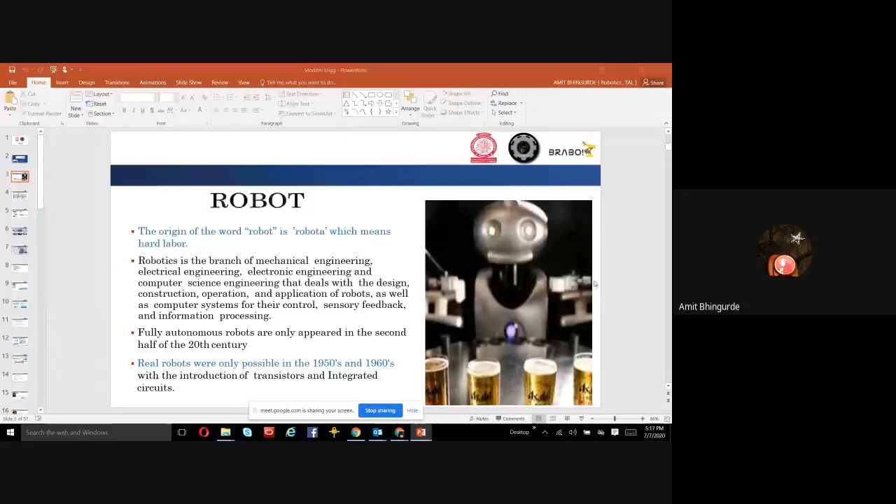Now, if you see the difference between the robot and a human being, if you take features like manipulation: in the human being, manipulation happens with the arms, fingers, legs, or muscles, whereas the robot has motors, drives, and some forms of actuators. There's vision, which is the eyes for the human being, and for the robot it's a camera.

Smell is the nose for human beings, but there's no smell sense presently developed for robots, though research is going on in Japan and Europe on how smell can be detected. Similarly, for taste we have the tongue, and no particular element has been developed for that, but research is still going on at this level too, because robots can also start tasting.

There has been some research already, and good results have come up in this area. Feel is a sense for human beings, and tactile sensors are basically for a robot which can sense multiple things.

Nowadays, a sense of feel for the robot is also available, which can sense and feel. Communication for the human being is the nerves, whereas the robot has fiber, wires, optics, radios. Thinking capacity for the human being is the brain, and the robot has a controller, basically computers and microprocessors.

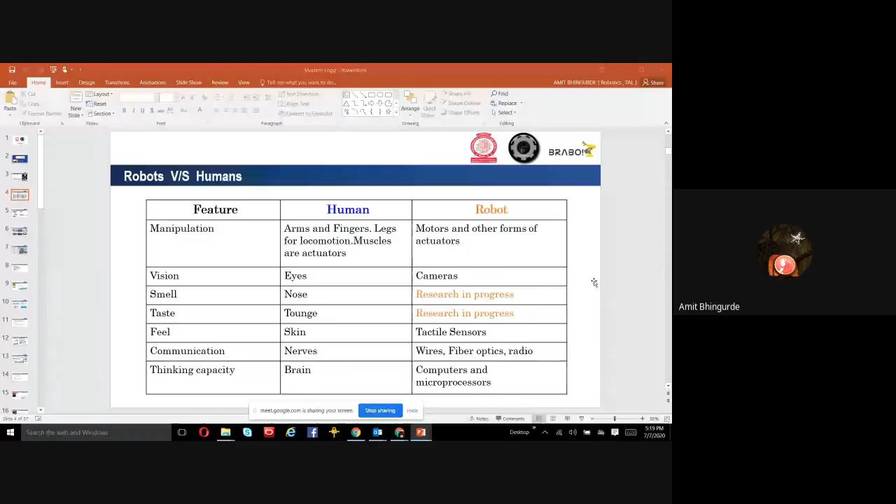So if you take the area of robotics, it is mainly categorized. This is my categorization; there could be multiple categorizations, but as far as robots are concerned, I would categorize them into four different areas.

That is industrial robots, mainly used in most industries, small scale industries, as well as OEMs, and service robots. Those are medical robots, security robots, research robots, household robots, and entertainment robots.

Now the third category is collaborative robots, recently developed, which can work together with a human being. And finally, soft robots, like RPA, robotic process automation.

So what are these robots developed for? Mainly to find out how to do tasks that are dull, repetitive, and dirty. There's so many examples—I'll give some in the next slide—but dirty tasks, dangerous, difficult tasks. There's space robotics coming up now, underwater robotics, robotics assisting physically challenged people, nuclear science, and biomedical equipment.

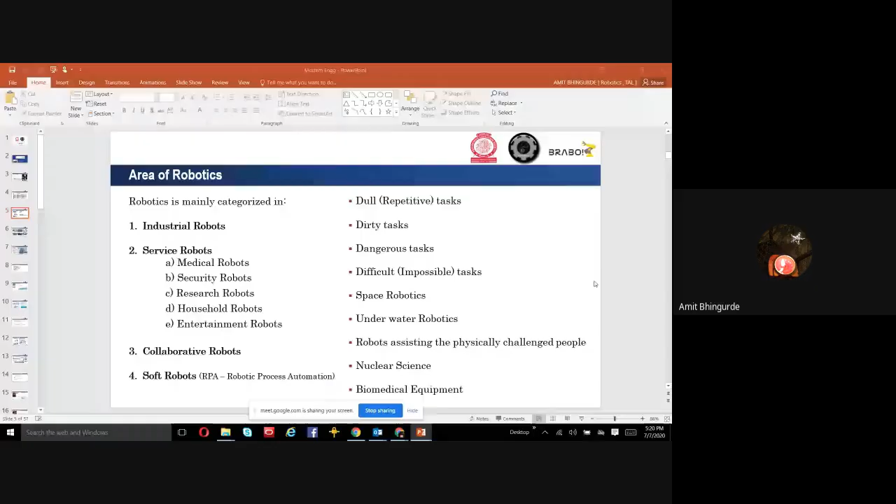So these are the areas of robotics. Some examples: in medical, you must have heard that robots are now doing heart surgery.

There are some robots doing knee surgery. There's robotic aircraft. There are military robots doing security. Also, most robots in Israel, for example, are doing border security—there's no human being, but everything is managed by the robots.

The industrial robots are the normally common robots; some of you must have already seen them. These robots are widely used across the world.

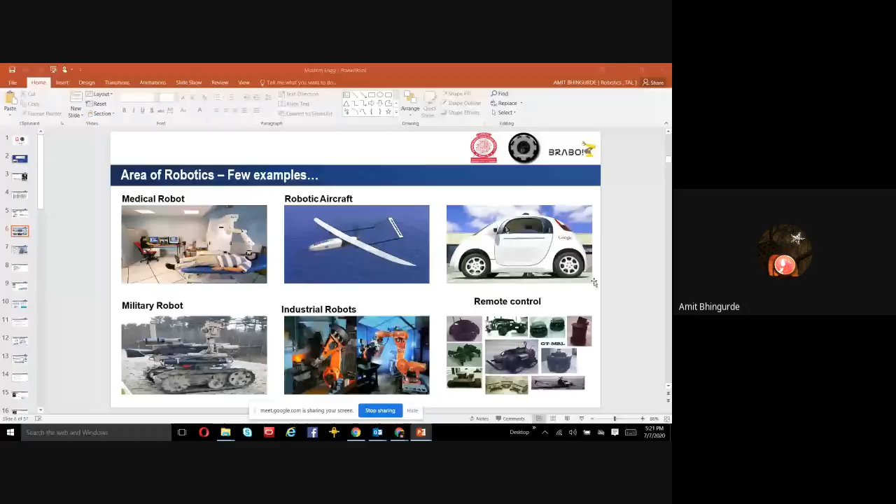And finally, these are remote control robots. Like now, autonomous cars are coming—Google has developed a car without a driver. So those are also called remote control robots.

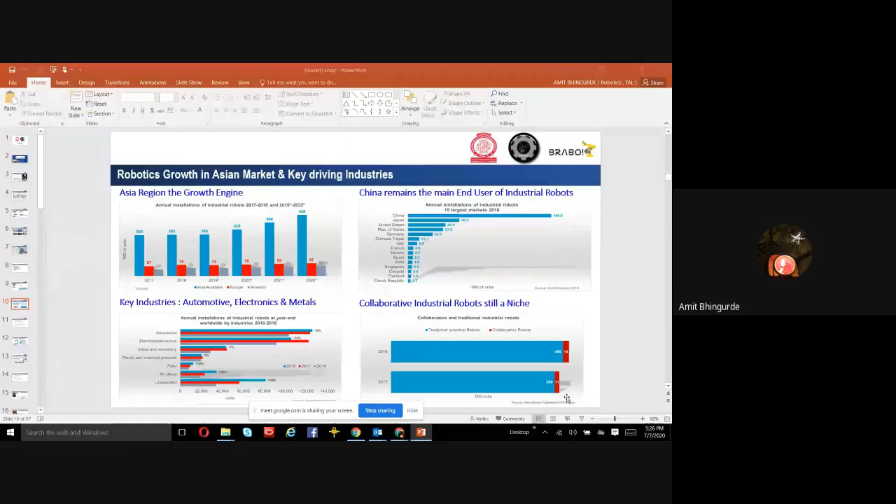So today, the technological development expanding robot adoption is mainly because of more intelligent components, that is smart grippers, because the robot can take a particular gripper, and the gripper has sensors and a lot of intelligence. That is one of the biggest components in robotics. Second is greater connectivity, like plug and play. You can take the robot, plug it in, and start working on it, making multiple applications.

There's also cloud computing. It's easier to use. Earlier you needed special skill sets to use the robot, but now it has been made very, very easy, basically through programming by demonstration, because you show it, and through visual inspection, the robot can understand the program of what you want to do, and it can perform the activities.

What is going to happen tomorrow? You all must be knowing now about machine learning, deep learning, and artificial intelligence, which is going to enable the robot to learn by trial and error. You may not be perfect, you don't know what activity needs to be done to perform a particular task, but the robot can learn and then perform by trial and error. There's self-optimization also possible by robots, and it can also communicate with other machines through different operating softwares.

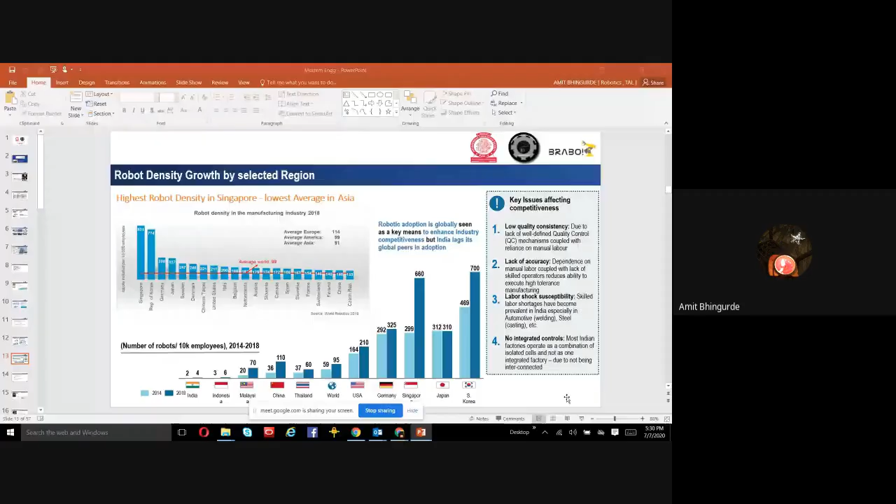So today, because of the current situation, there could be some turbulence in the future for robotics, but the future for robotics is still bright because the demand is going to increase in developed countries as well as non-developed countries because of the current situation. So automotive industry is basically going through a transformation.

Today you must have seen that a lot of automotive industries are having internal combustion engines, which run on petrol, diesel and gasoline, which is getting transferred to electrical vehicles. This is going to be a huge change that could give some dip to the robotic industry also, because consumption will be less till they develop the electrical vehicle.

There is also declining sales, especially in smartphones, automotive, real estate, consumer goods, etc. That will also impact it a little bit. And there are some political headwinds like trade wars, currently between China and America, and globally there are a lot of trade wars going on. That will give some turbulence in the robotics business.

However, tomorrow, the new emerging and rapidly growing market is going to happen in most countries, because everybody wants to go for change, a new style of living because of the current situation. There's also increased manufacturing flexibility expected in most industries. Everybody has an aspiration for a different car; nobody would like to have the same car their neighbor has. That is the reason everybody looks for flexible manufacturing, different kinds of robots, and different types of equipment. Anybody would like to have a new kind of equipment.

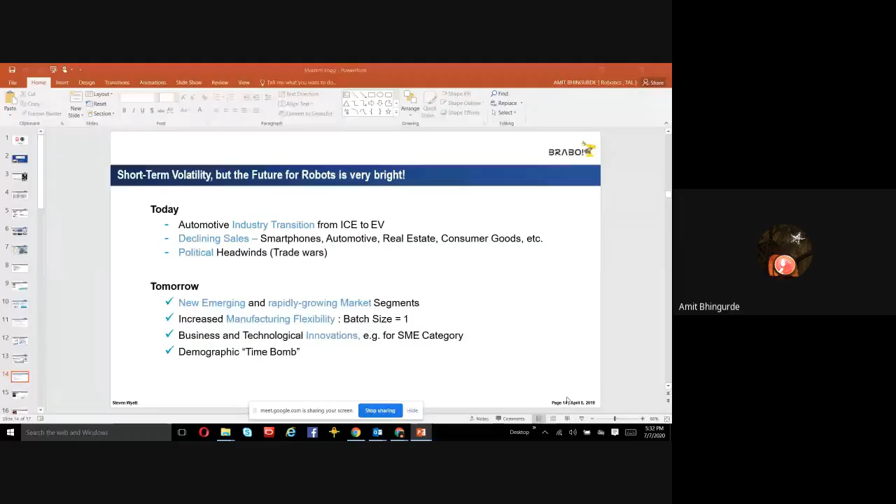Now coming to the service robots, as I mentioned earlier, industrial robots and service robots are the major categories. In the service robot segment also, there's huge growth happening from 2018 onwards. In 2018, a 32% increase happened, whereas by 2022 it's expected to be almost 45% increase in the world for service robots. The service areas are logistics, medical robots, field robotics, and defense. The major growth will happen in logistics.

Earlier, there were small grocery shops. Today you see a lot of malls, and in the malls when you want to find a particular material, you don't find it. You need to really search in the mall. So there's a possibility that robots can find the right material for you.

That is why robotics is going to increase in the logistics area. Medical, of course, you must have seen robots coming in, especially during this COVID situation. Field robotics is also a huge demand area.

Currently in India, we are very good in agriculture. A lot of our economy depends on agriculture, but we don't have so many robots in the fields. Whereas in America and Europe, there are a lot of robots in the fields, but unfortunately their economy is not so dependent on the fields. If we can bring more robotics into the fields, there's a lot of opportunity for the Indian market, and of course for defense for all countries in the world.

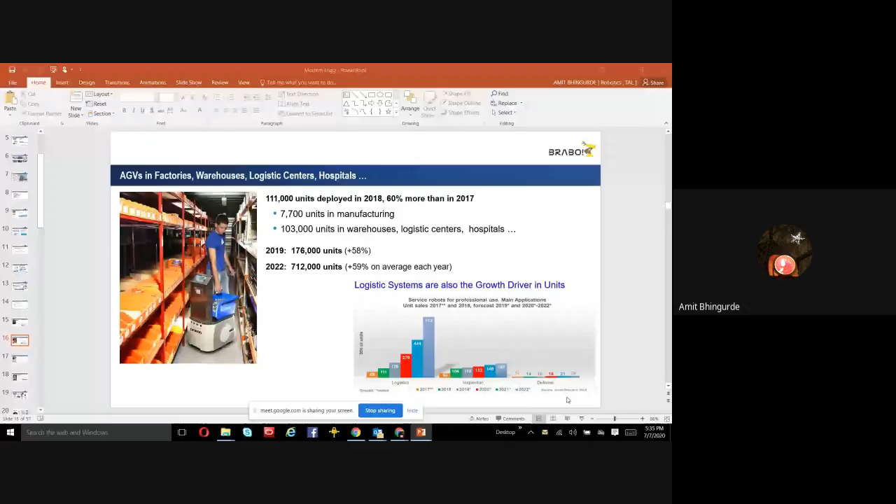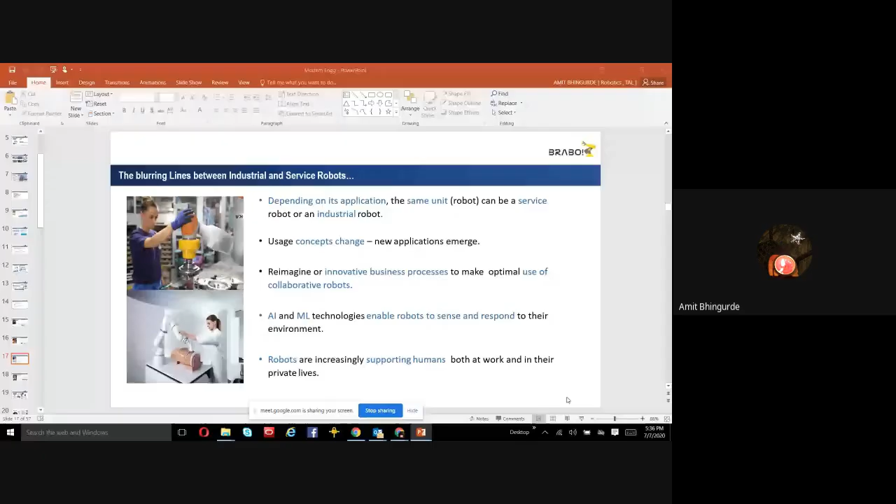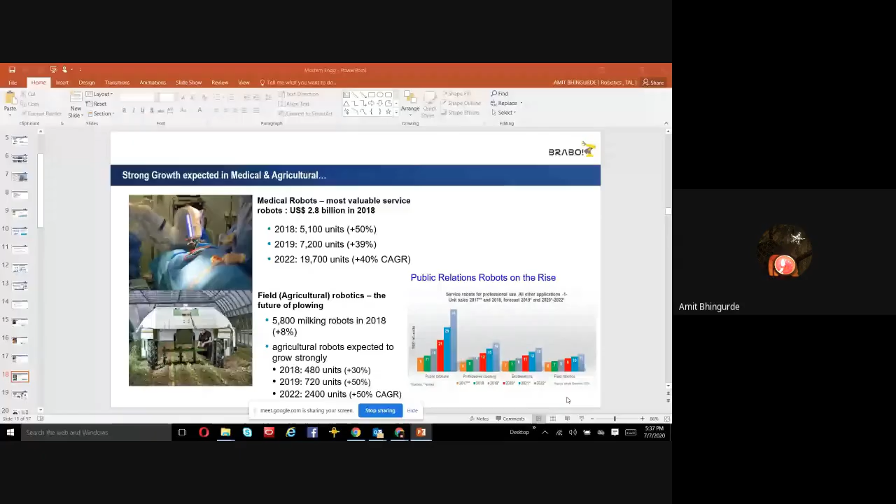There's field robotics, which I already mentioned, with a 50% increase expected in agriculture. Most of these robots are also used as milking robots. There was 8% growth in 2018, and further growth is expected, almost 50% by 2022.

So with this background, I wanted to come back to our own company, Brabo Robotics and Automation, and how it was formed. To give a little background of robotics in India, we started in 2000. This company, called Telco Automation Limited, was formed out of two divisions of Telco. Earlier Telco, now Tata Motors, had a Machine Tool Division and a Growth Division. These two divisions got combined together, and TAL was formed.

In 2015, we entered the robotics and automation business. We created the first Indian articulated robot, and we showcased this robot in 2016 in Mumbai in the Make in India program, which was widely accepted. In 2017-18, we launched this robot with about 10 kg and 2 kg payload capacity.

The idea behind making this robot came from when we were making the Indica plant. The Indica plant was first made in 1999. We installed the first robot in Tata Motors in 1995, the first time we used a robot in a Tata Motors line, mainly for the first newly developed indigenous car, the Indica. The line was made especially for the body shop, where the complete body is made for the Indica.

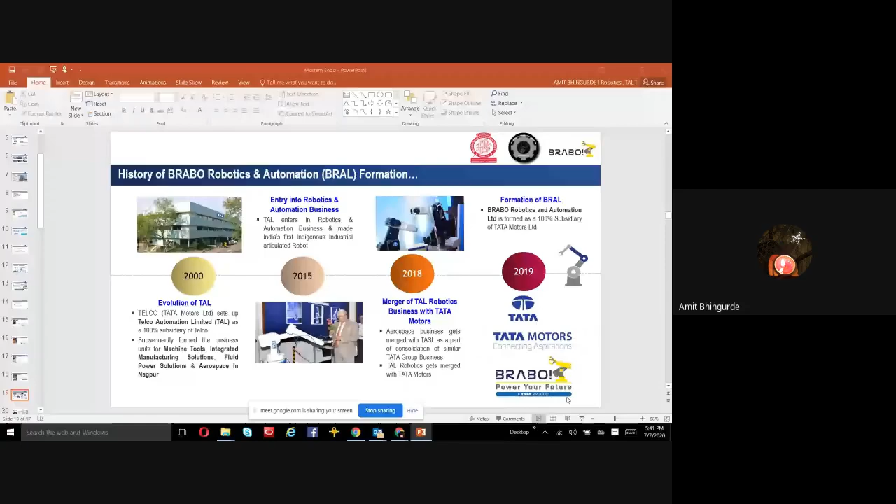In the beginning at Tata Motors, as I mentioned earlier, Indica was 105 seconds. We created a second line for Vista and Manza at 54 seconds - earlier it was less than 2 minutes, now we created a line for less than 1 minute. This is what operational excellence means - we keep improving. The latest cycle time in any body shop worldwide is only 27 seconds. You can imagine one car comes out every 27 seconds in Germany.

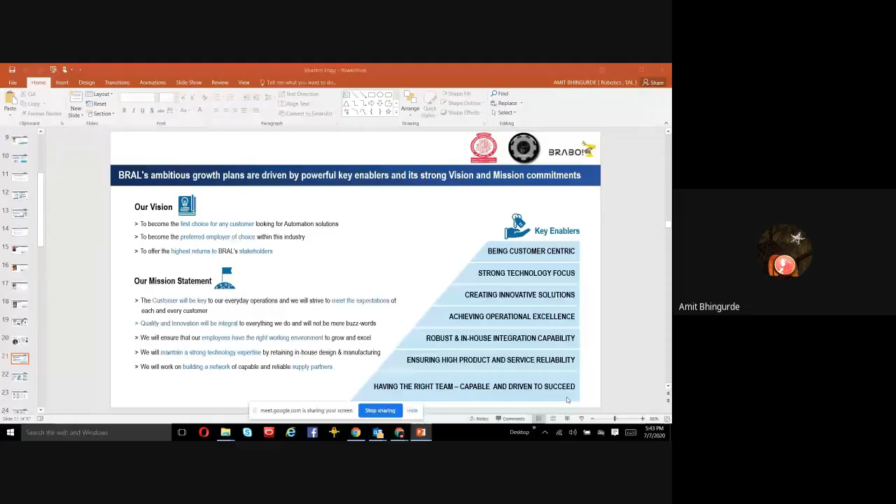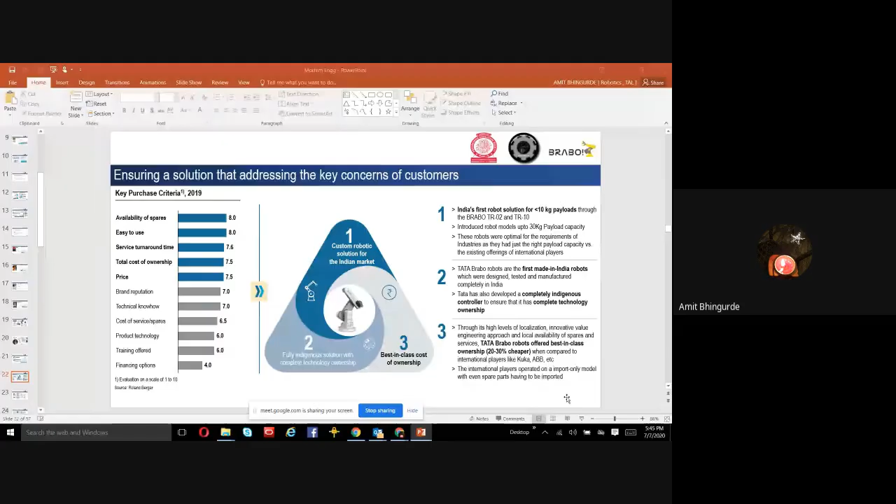Considering this, we decided to enter into robotics, and we created the first indigenous robot in India. We are the company that created the first articulated robot manufacturing line, and we launched this robot in 2017 April. To start with, we created a 10 kg payload capacity robot.

Why 10 kg? Somebody may ask. As per the ILO standard, that is International Labour Organization standard, any operator can lift up to 10 kg payload capacity. And the reach of the robot is about 750 to 800 millimeters, again like a human arm.

And the speed of the robot is almost 1000 millimeters per second. This is actually more than sufficient, like a human being doing repetitive work, dull work, and some of the dangerous work. So that is why we created the robot with this specification to start with.

Then we created a 6 kg payload capacity robot, mainly used for welding and other applications. But those robots were mainly stepper driven motor and belt driven motor. Subsequently, we created a high speed, high reliability, and high repeatability robot for 12 kg and 20 kg using servo driven motors.

These robots we have recently launched, but the 12 kg, 10 kg and 6 kg payload capacity robots we already installed in most of the small scale industries. Now more than 100 plus robots are working across India, and that was a good breakthrough for us and for Indian industries, especially creating such kind of robot for small scale industries. And these industries are not only automobile industry, we have given it to different industries.

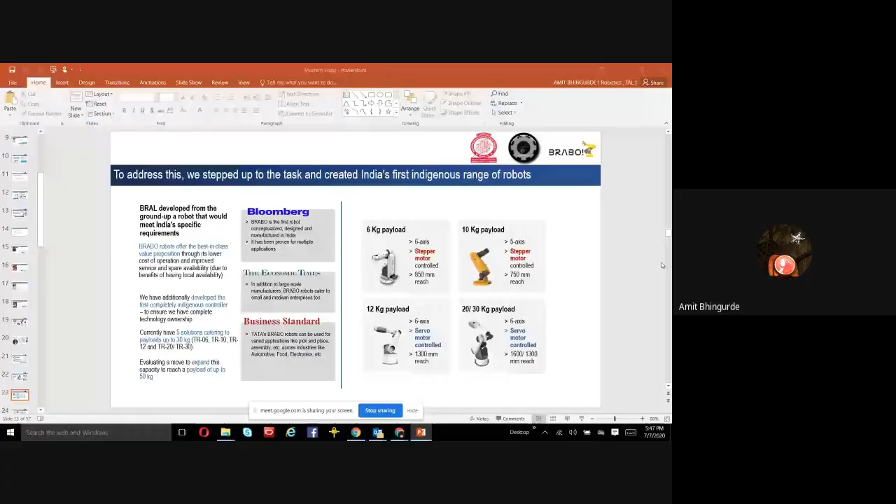So the genesis of the idea of BRABO, the journey till date: in 2014 we created the first prototype articulated robot. In 2015 we created the controller, which is indigenously developed, complete programming including all components inside, developed entirely in India.

In 2016, we launched this robot in Make in India, and we also received the certificates for CE and IP certification, which is mandatory for operating robots. In 2017, we launched the robot for the market, and in 2018, we also received a lot of awards for developing this robot. In 2019, we again came out with the 12 kg up to 30 kg robot with servo-driven motors.

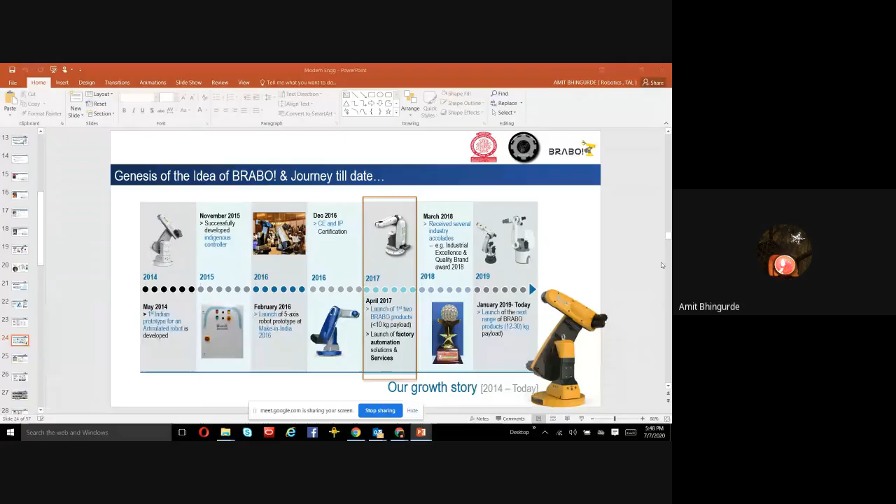Our business focus in BRAL, that is Brabo Robotics and Automation, is on three pillars: robotics and application. We have our own robots up to 30 kg payload capacity, and probably going forward we'll be designing and manufacturing up to 50 kg payload capacity. That is our first pillar.

And we also do the robot applications. Along with the robot, we also do a lot of applications, especially MIG welding, handling, sealing, gluing. All these applications are done with our robot.

Second pillar is factory automation, smart manufacturing, where we can also integrate other robots, for example robots with different capacities or different makes. And third pillar is service. That means wherever the robot factories or robotic applications are, we can also run those robotic lines ourselves, on a pay-on-production basis.

So currently we are manufacturing bogies for the Indian Railways at one of the factories in MCF, the modern coach factory in India. This factory produces almost 4 bogies per day, done completely by robot, and we are only doing the supervision part and maintaining those robots.

Our target industries are automotive, castings, forgings, pharmaceutical, ordnance factory, construction equipment, logistics, aerospace, and general industries. Our target customers range from small scale industries to large scale industries.

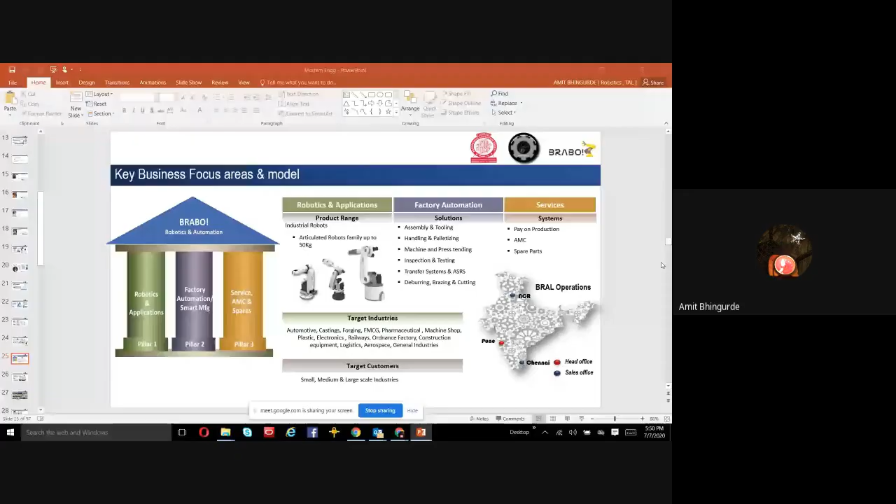We are a complete turnkey solution provider. Along with the robot, we also give the complete line, including equipment like handling systems or grippers. This is our USP, and we have given a lot of integration to many companies across different industries.

The major applications done by our robots include machine tending, pick and place, vision system, sealant, deburring, palletizing, abrading, deflashing, grinding, and welding. These are the main applications we have created.

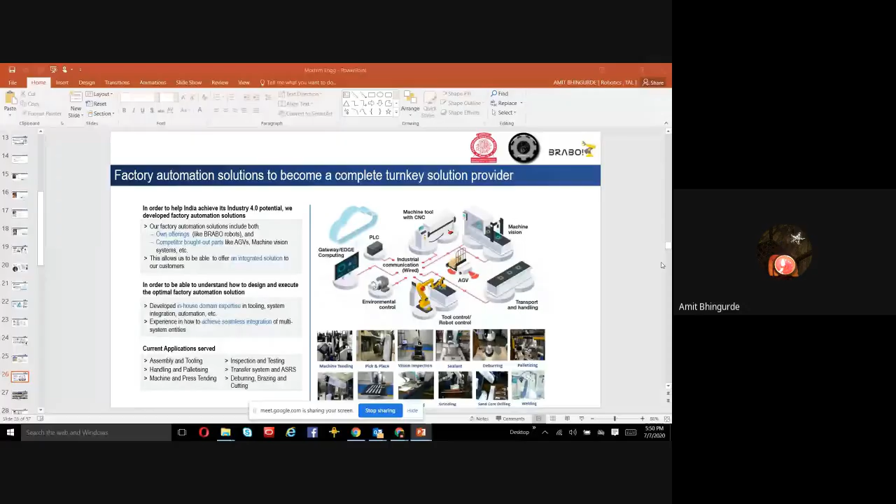Under factory automation, we have given a complete robotic manufacturing line, especially for the automobile, moving equipment, and general industries.

A lot of jigs and fixtures has been given for railways, aerospace, and bus industries, and we have also supplied a complete aircraft manufacturing setup to Alenia in Italy. All the fixtures were supplied by us.

There's also material handling systems. We give overhead material handling as well as slide conveyor systems which move on the ground. All this material handling has also been provided by us.

We are one of the providers of very automated material handling called ASRS, Automatic Storage and Retrieval System. The biggest ASRS system in India has been given by us for the Amul Dairy and Banas Dairy.

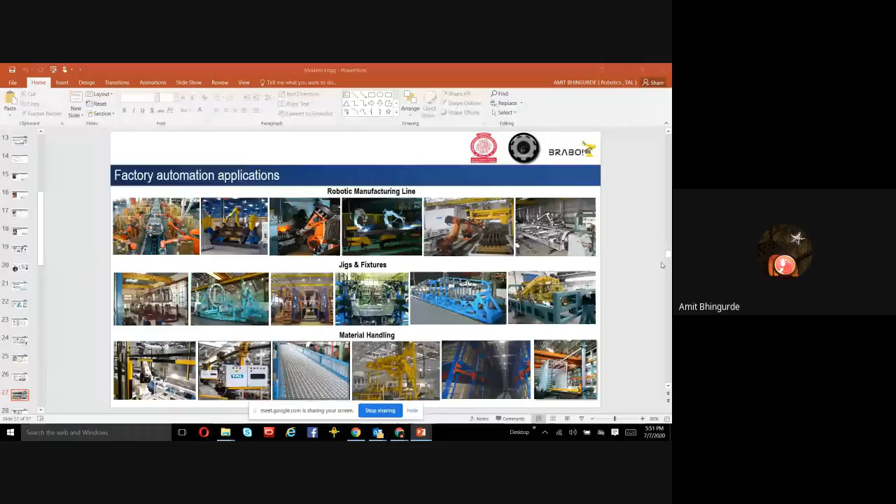In a short time, we created a lot of suppliers and customer base, and we are the preferred supplier for most customers in automotive, FMCG, aerospace and defense, industrial, and education sectors. We have now recently started creating an educational cell, EduCard, which I'll cover in future slides.

We received a lot of awards. In 2018, we got the Best Technology Award, Make in India Award, Quality Brand Award, and Industrial Excellence Award. One of the most prestigious awards was recognition by the IFR, International Federation of Robotics.

We have been identified as number 30 in the world to start this robotics venture in a very short time. We also participated in Tata Innovesta, one of the great competitions within the Tata Group, and got the Best Product Innovation Award from Tata Innovesta.

From ASSOCHAM, we also received the Emerging Technology Award in 2019. These awards have given really good motivation for the entire team, and after receiving them, we are expecting many more in the coming years.

Coming back to the teams, when we started our journey in 2014, we had only 4 members, very young, fresh from college. With those 4 members, we created the first prototype, which was shown to the board members, and subsequently we added members. Now by 2019 we have more than 100 employees working in robotics and automation.

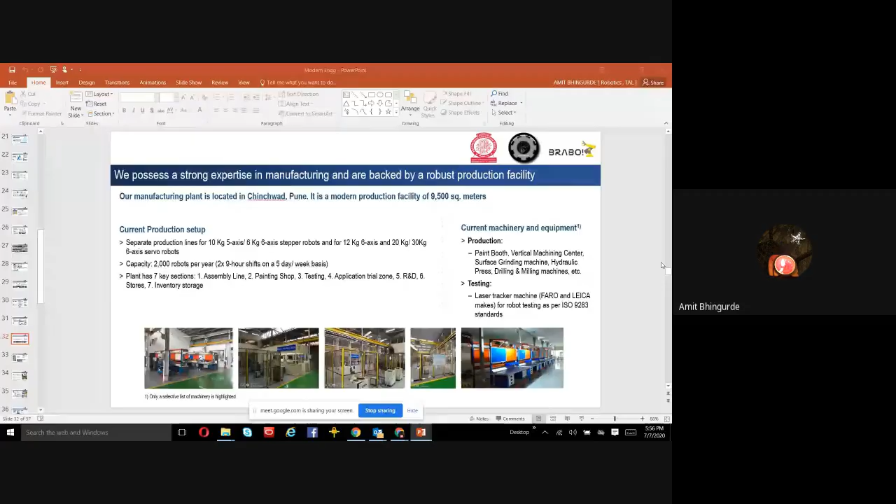So these are one of the testing areas for robotics where we can check the speed and reliability of the robots for each and every axis, and this gives a lot of confidence in the team when the robot goes to the particular application, whether it will work or not. So we have all these sophisticated equipments which are available, and people are expert to run this equipment and test the robot.

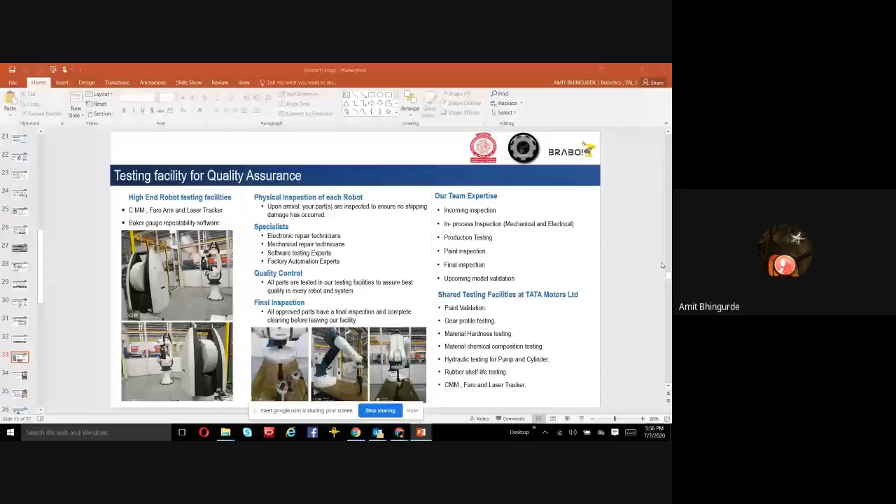Coming back to the automation, it is going to be a very key factor for post-pandemic. And what is the opportunity in India? This is focusing on three factors: automation, education, and prosperity of productivity. So this is what is going to be a key focus.

So cost optimization is going to be a major driver because everybody is very cautious about the cost, and companies should also be willing to go for investment in automation because they have lost a lot of operators. Many people have gone home, so they don't get the operators, and that is the reason they are looking for automation.

The people are also empowered by automation. Empowerment has to be given to most of the team members within the organization so that we can face this current crisis. Automation and jobs are not mutually exclusive, and focus on humans achieving their full potential and aspiration is a must.

Today in Tata Motors, the production which is going on, more than 1,000 cars or vehicles per day, has suddenly dropped to maybe a maximum of 10 to 20 numbers. So you can imagine how much huge loss is happening, and this is not only for automobile, but this is happening for all other industries as well.

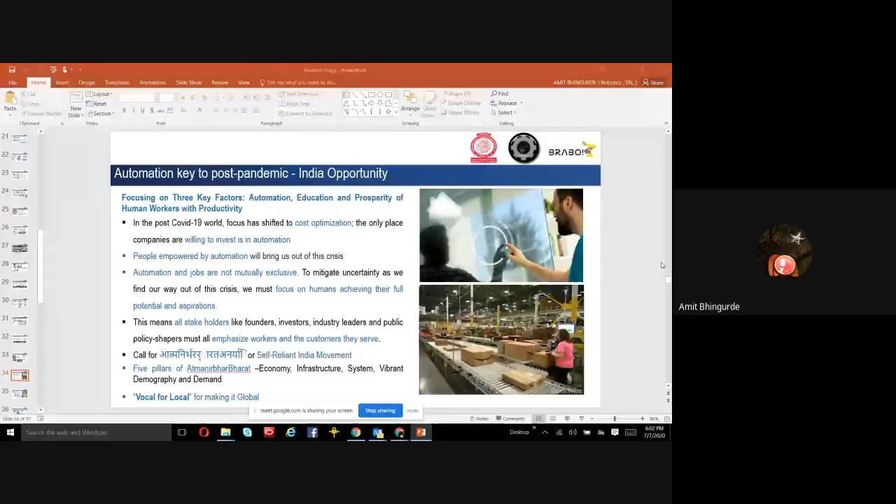So why are we the right partner for the country's automation requirement today for robotics and automation? Because we created the first indigenous range of robots, at the best in its class cost of ownership. Today we are almost 30 to 40% lesser compared to any other competitor in terms of cost of ownership.

We offer complete integrated offerings. The person or the industry can only mention the problem statement and we give the complete solution. We also have coupled automation and service capabilities, and we maintain those equipment for a long time because being locally available, we can serve them much better.

There are also benefits from a strong leadership team and a supportive organization structure. We have really strong organization teams or leaders in each area, each department. They can take their own call and support the entire team and organization structure, which in turn helps them serve the customer much better.

We have built up strong ecosystems, and we also have a very huge vendor base supporting us. Those are the extended arms for us.

There was a lot of concern, as I mentioned earlier, that one disadvantage of automation is that people feel it will reduce the number of jobs in the company or industry. But I'd say it's the other way around. When we started making the robot, nobody was there. We started with only 2 or 3 people, and now we have more than 100 employees working only in robotics and automation. So we created employment.

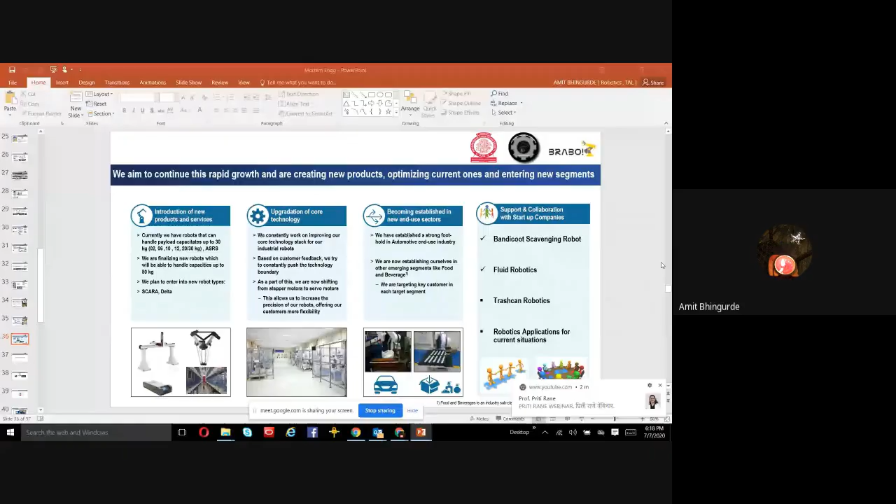Now coming back to the academia, our idea is how we can bridge the gap between academia and industry. Today we find a lot of students who say, I've done a lot of work, I've studied a lot in robotics, but they are far behind in the practical things. That is what we wanted to bridge, the gap between industries and academia, and what is required to do that.

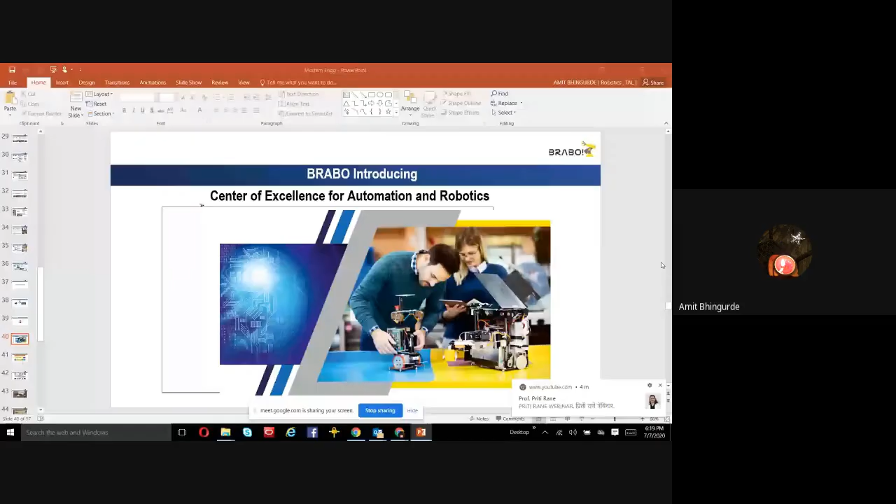So what we created is how we can give or impart this knowledge to the academia. We created a Center of Excellence for Automation and Robotics, and we came out with a different option for the Center of Excellence for Automation and Robotics.

The Center of Excellence in Automation and Robotics is basically a big lab, starting with the material, how to use the material, what material is used, because today we have casting, there could be carbon fiber, anything can be used. So different materials are also required, and other equipments are required. All this list is given to them, and either the college can buy it or we can give the complete turnkey solution.

We also give complete training, and there are other sections like mechanical, electronics, and research platform. All support is provided by us. So this is one of the glimpses you can see of the Center of Excellence for Robotics and Automation.

So we give the complete turnkey solution, including the 3D printer, then there's a robotic research platform, and what other research is possible in the current scenario in India, as well as what is going on in the world.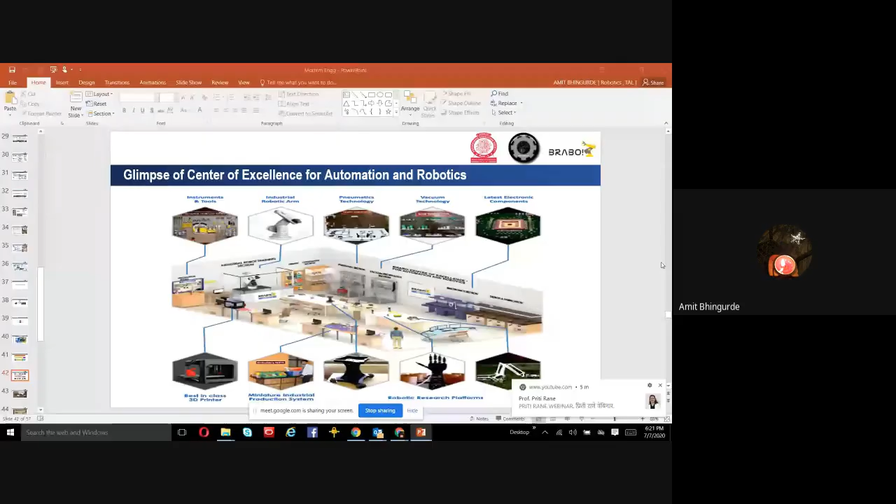We also have instruments and tools required for robotics, and there's pneumatics technology, vacuum technology, hydraulic technology. All these technologies, based on the requirement of the college and universities, we can provide them, and how to integrate all these things together along with IoT solutions or RPA solutions. So this is another picture of the Center of Excellence.

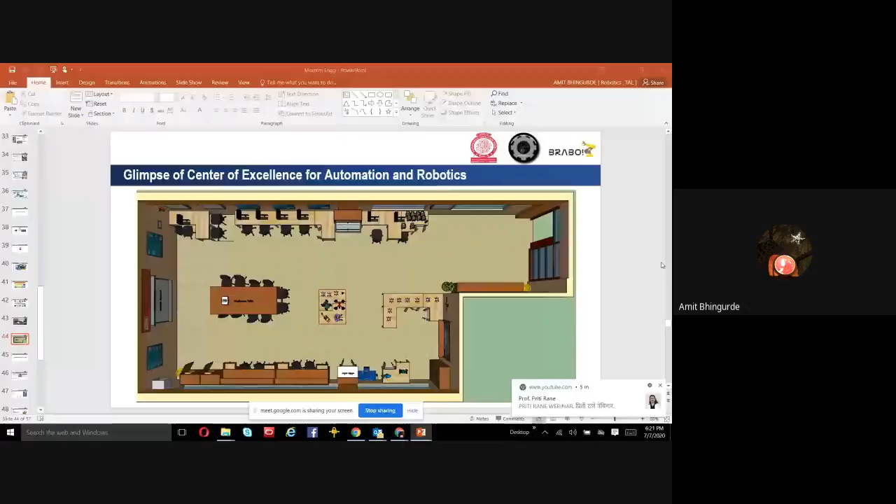Now what we have done is to help students understand basic robotics and learn real robotics, so that whenever he comes out of college, he is ready for industry. That is the reason we created approximately 4 options where different kinds of robots are there, or rather, the robot remains the same but the applications are different. These applications are created by the students themselves. We only provide the equipment and train them with hands-on experience, and then they can do it themselves.

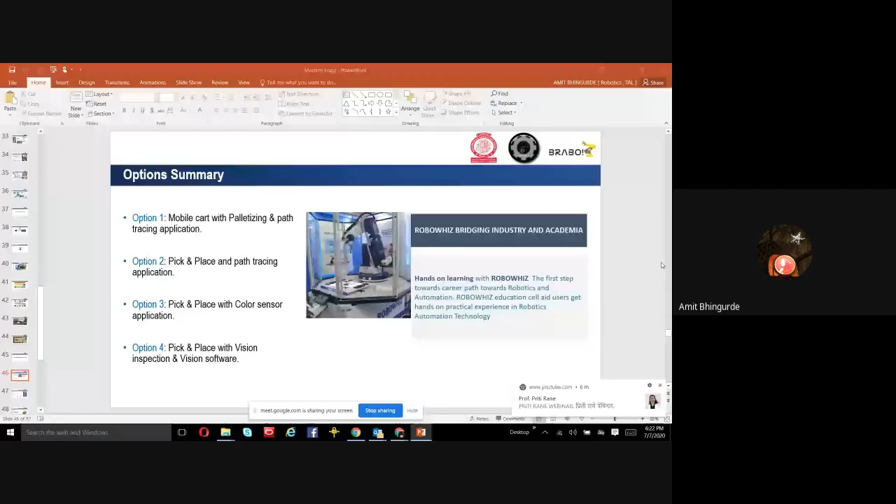Option 1, where we have given a 10 kg payload capacity with a trolley, and different applications are there with a gripper assembly and then cart chassis, as a palletizing and path tracing application. This can be used as a standard cell which we sell, and the students can work on that. Once they understand this thing, they can create new applications using the same process.

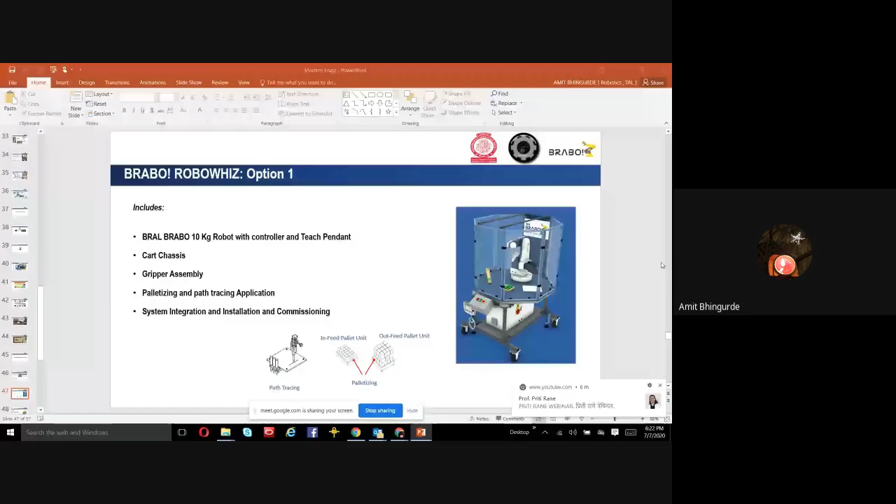Similarly, option 2 has a different layout. It's a fixed layout, and it has a gripper unit, then there's a ball matrix and whiteboard marker unit so that a robot can write something, and they can design how to write. Then we can place parts too, and path tracing is also there.

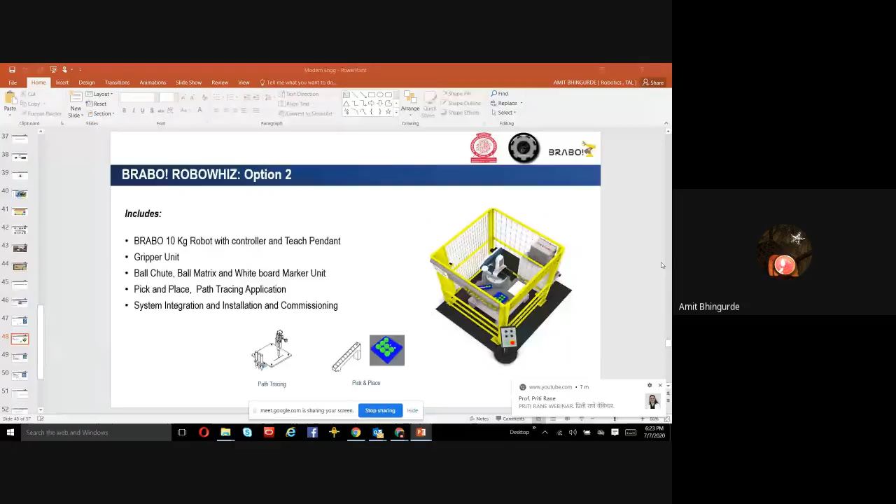Similarly, we created option 3 with different applications again, but more or less everything remains the same, the basic robot remains the same. Only the application required and also the end effector keeps on changing.

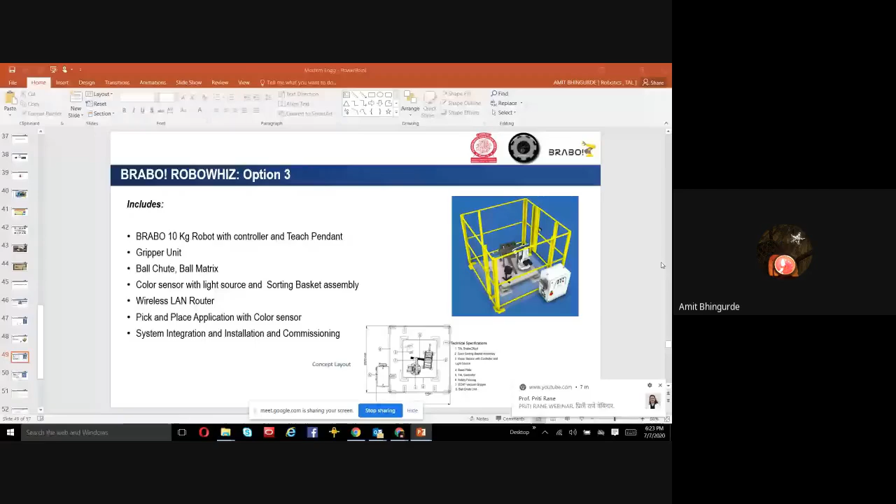Option 4, which has a 2 kg payload capacity, is a small robot that can also be used for sensor applications and vision sensors and lenses, and it has vision software.

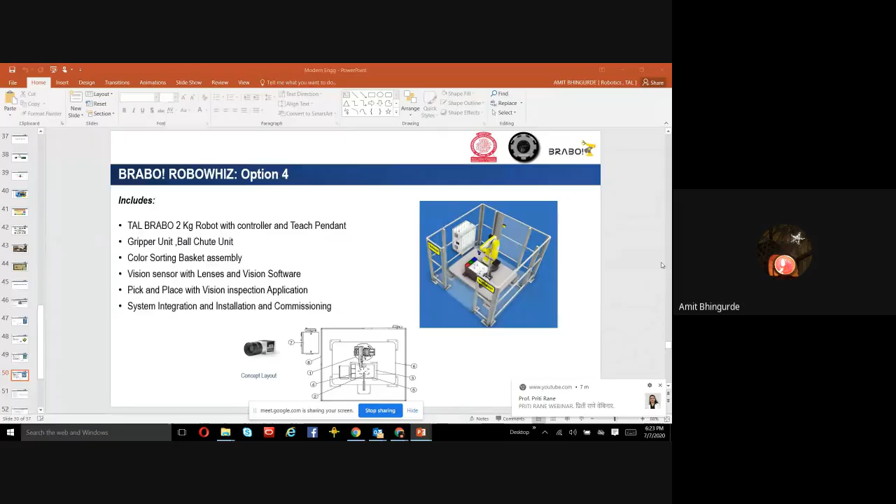Most of the 3 options have a 10 kg payload, 750 millimeter reach, and are 5-axis, stepper driven robots, because if students understand this programming, they can run any other robot since the concept remains more or less the same.

The excellence of the BRABO Center of Excellence, return on investment and other benefits are: we provide necessary technical edge, complete technical support and guidance. We also set up the entire lab and provide training not only to students but also to faculty, training the trainers so students can also train the next batch.

We also have 1-year technical assistance, and can provide full-time support if required. We normally sign an MOU with the academia, giving complete support even for developing the syllabus for that particular college. There's also assistance in doing projects and research papers, and we give self-sustainable technical and financial support if required.

We arrange industrial visits, whatever we are manufacturing, and students can come and visit our factory. There's a possibility of getting an internship at BRABO, maybe 1, 2, 3, or 6 months, sometimes even 1 year. We have a lot of students coming from across India.

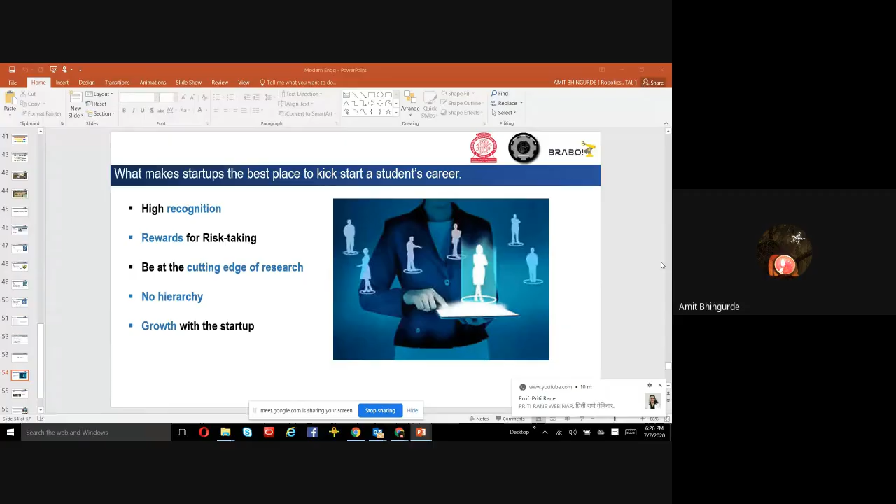But the expectations are that it should be new and innovative ideas, and it should be tested. The product should be tested at least with a prototype, and we can lower the cost of innovation by supporting them and reduce the risk of innovation.

BRAL can support defining key performance indicators, and to build a sustainable model we can support program governance structure to build a strategy. We also work together with the person collaboratively, with mentorship, and of course growth strategy support.

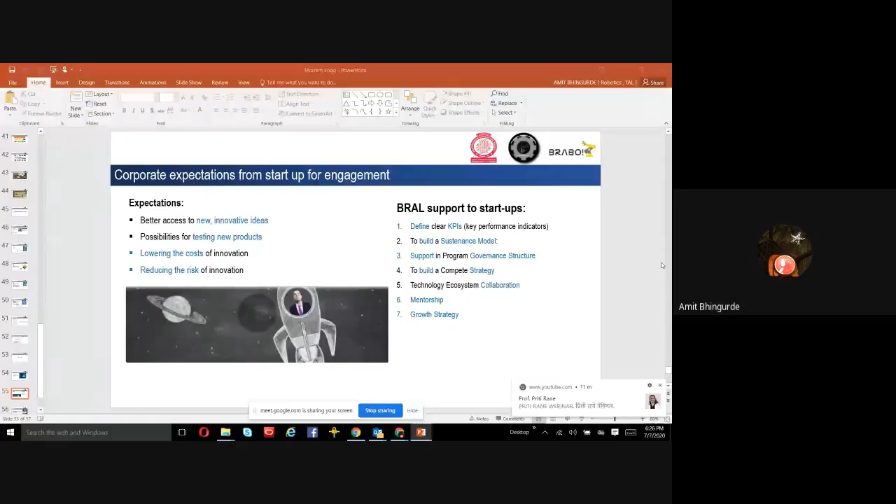With this background, we created, as I mentioned earlier, Genrobotics, which created this scavenging robot. We signed up with them on 17th of November, along with Dr. Mashelkar. In fact, we received the Anjani Mashelkar award for this innovation that Genrobotics had received, and on the same day we signed the memorandum of understanding to support them for designing as well as manufacturing.

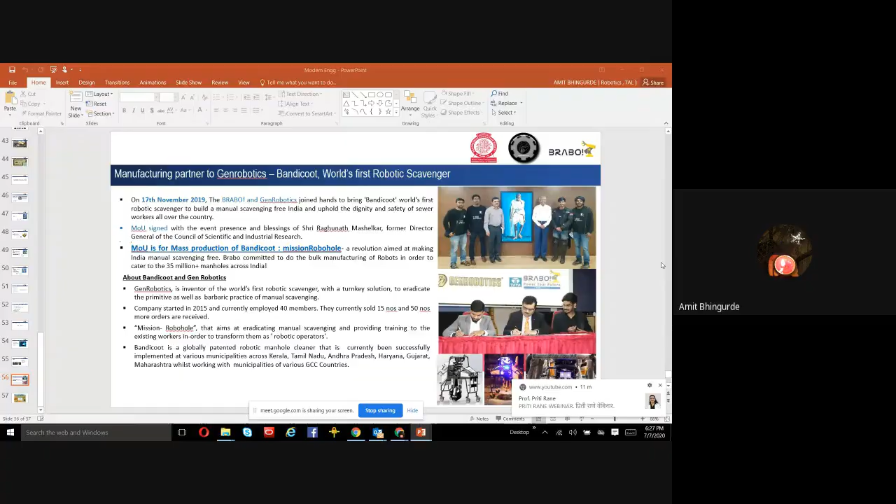So with this, thank you very much, and I'll be happy to take any questions if there are.

Thank you, sir, for your nice session. There is a question. Hello? Hello, can you hear me? No, it's not clear. Okay sir, now is it audible? Hello? Yeah, yeah, now it's audible.

There is a question from Lahudkar, sir: what is the procedure to sign an MOU with your organization or company? They can visit our company, and our colleagues can get in touch with them. For example, if they want a center of excellence training setup or a training cell, they can sign up with our company. There are standard formats; they need to sign the NDA, the non-disclosure agreement, and probably we can sign the MOU.